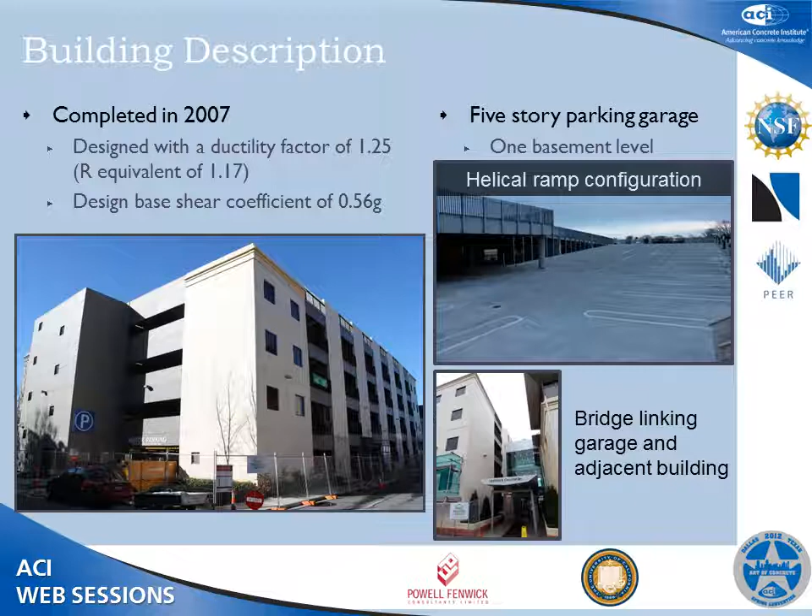The layout of the structural walls along the perimeter in the north-south direction includes 2 walls on either side that I'm calling end or corner walls that are 21 feet long, and there are a total of 10 soldier panels, as Hannah calls them, that are roughly 10 feet long, 10 total. I'm going to focus on the north-south direction because this is the direction where most of the damage accumulated. In the east-west direction, the damage was not nearly as severe.

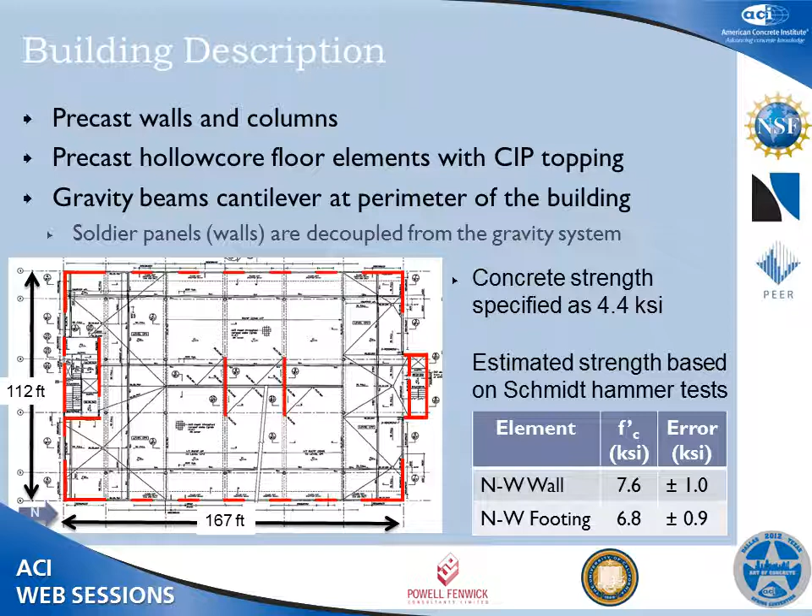Specified concrete strengths are 4.4 KSI. And on the expedition, while we were there, we estimated concrete strengths on the order of 7.6 or 7 KSI using non-destructive testing. Even though it has a large estimated error, we do expect concrete strengths that are much greater than the specified 4 KSI.

A little background on the Christchurch events for those who aren't familiar with it. It began in September 2010 with the Darfield Earthquake, a magnitude 7.1 earthquake that was 22 miles from the parking structure that we're talking about.

The epicenter is here, shown at the green star, and our structure is here just above downtown Christchurch. That was followed by the Christchurch Earthquake on February 22nd, a magnitude 6.3 earthquake, with an epicenter here, just 5 miles from the parking structure. 2 subsequent aftershocks, both magnitude 6, were located within 6 miles of the parking structure, located here.

And if we zoom into the city of Christchurch itself, the structure is located here, and 2 GeoNet sensors recorded all of these seismic events. The stations are located 1.2 miles from the parking structure, and from the peak ground acceleration of these 2 sensors, just taking the average of the peak ground acceleration from these 2 locations, we have an estimate for the intensity of shaking.

I'd also like to point out the duration or the time lag between these events. There's 171, 111, and 193 days between each of these events. So there's enough time to inspect, to plan a repair, to implement the repair, and just then you're hit with another significant aftershock or event.

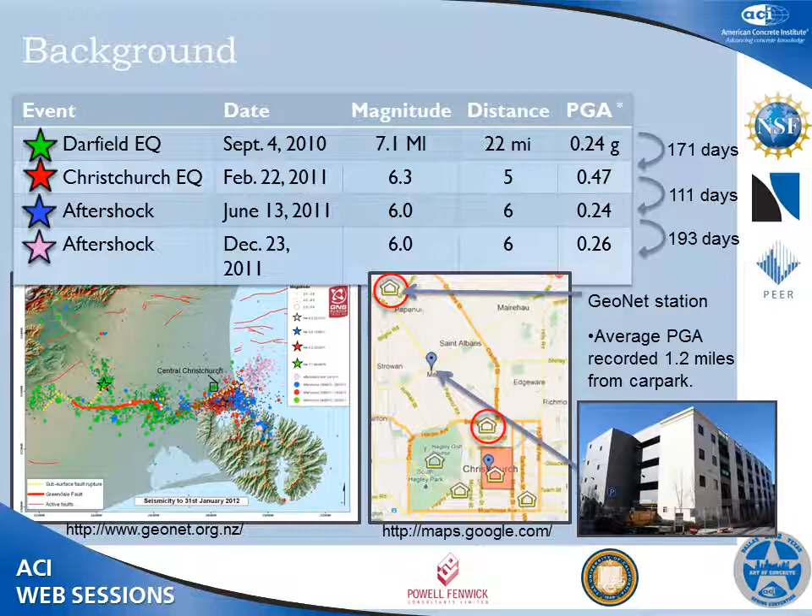In terms of the peak ground acceleration measured from those stations located 1.2 miles away, we have the first September event followed by a rapid inspection, the February event followed by rapid inspection that highlighted the need for a detailed inspection. And just as that inspection report was being handed to the client, the day of the June event, we were hit with a significant aftershock. That closed the building for two months for repairs.

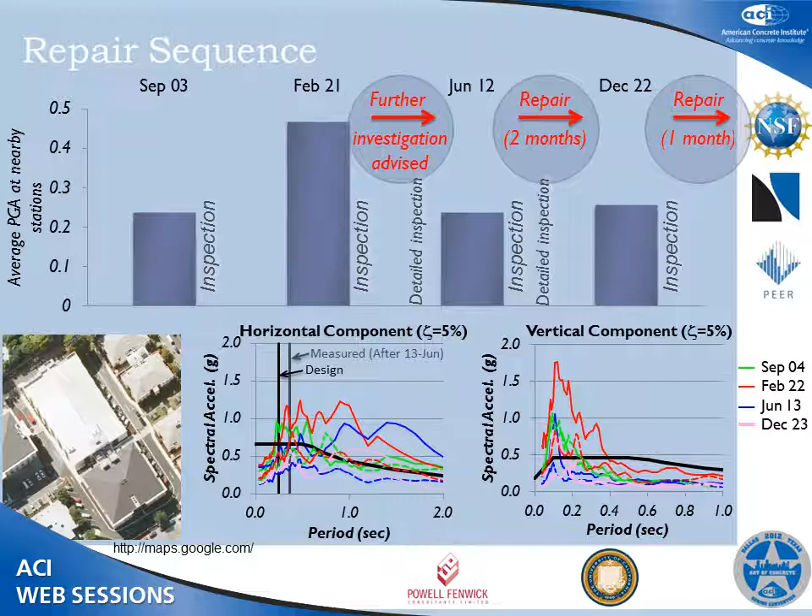After repairs were completed, another magnitude 6 aftershock occurred on December 22nd that required inspection and additional closure for 1 month. The 5% damped elastic response spectra are shown for the horizontal component and the vertical component in the graphs on the bottom. This is what I'm calling the north-south direction. Here you can see the adjacent building and the bridge linking the 2 structures. This is the New Zealand design spectra, and you can see demands significantly exceeded the 500-year design basis event.

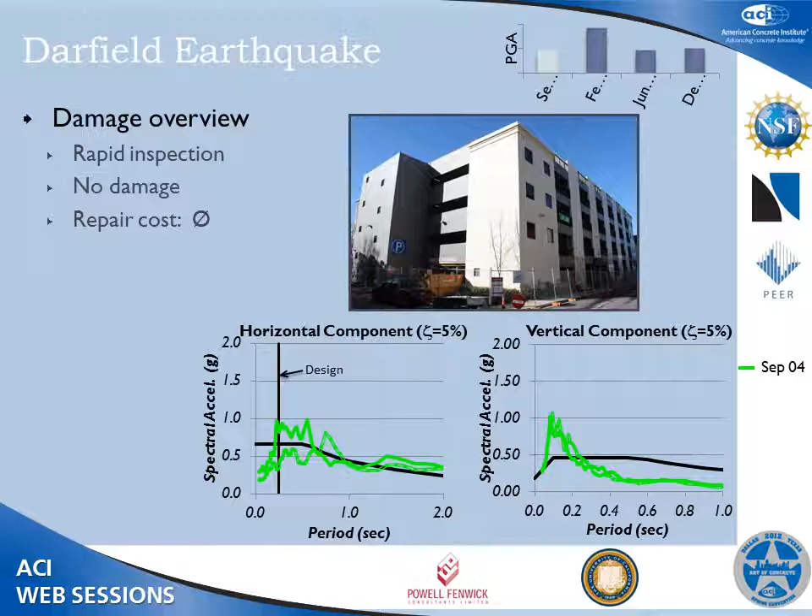The first event, the Darfield Earthquake in September, after a rapid inspection, there was no distinct damage that required repairs. We had no repair cost, despite this being what I'm calling a design level event. If this is our design basis response spectra, demands at the design period of the building are at, close to, or exceed the design acceleration, both in the horizontal and in the vertical direction. But no damage after the Darfield earthquake.

I think the surprise in the Christchurch earthquake was such a large earthquake so close to the downtown area that caused 185 deaths. After a rapid inspection, a more detailed inspection called for further investigation, which was removal of cover concrete to expose reinforcement that potentially failed, to see what needed replacing exactly. And although the repair costs were zero, the repair strategy was handed to the owner, but it was not implemented because of the subsequent June earthquake.

But in general, the damage was cracking of the soldier panels. Those are the more slender walls on the outside of the building, and on the corner walls, 3 of the 4 end walls had minor cracking, and 1 had significant cracking. And the repair strategy was simply to inject the cracks with epoxy or grout and replace the spalled regions with patch.

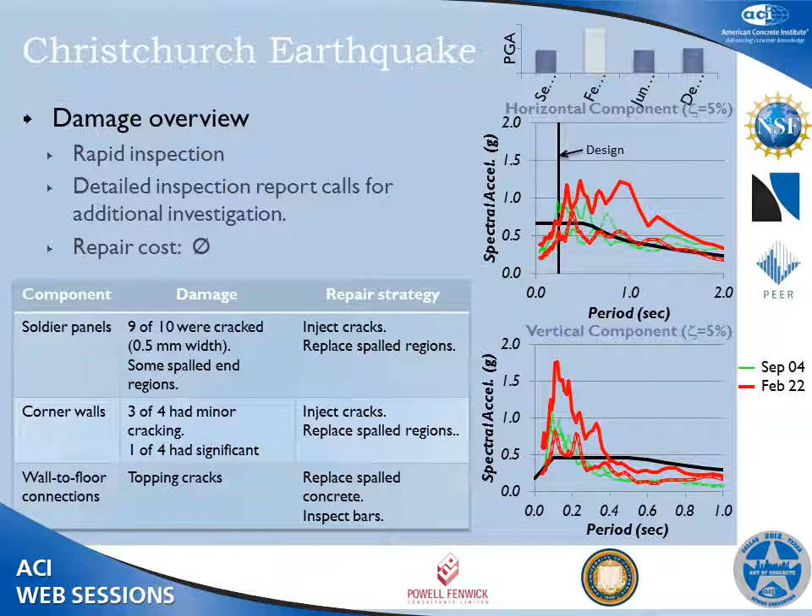In terms of this event, again, we're at a second design level event for the horizontal, and in terms of the vertical accelerations, we're above the design basis event. The black line here is the New Zealand design code for vertical acceleration. It's specified as 70% of the horizontal component.

This is an example of the damage to the connection between the floor diaphragm and the wall. This wall is located here in the northwest corner of the building, and it includes spalled concrete that you can see here that came from there, and cracks in the topping. And again, the inspection report is dated June 13th, the day of the June aftershock.

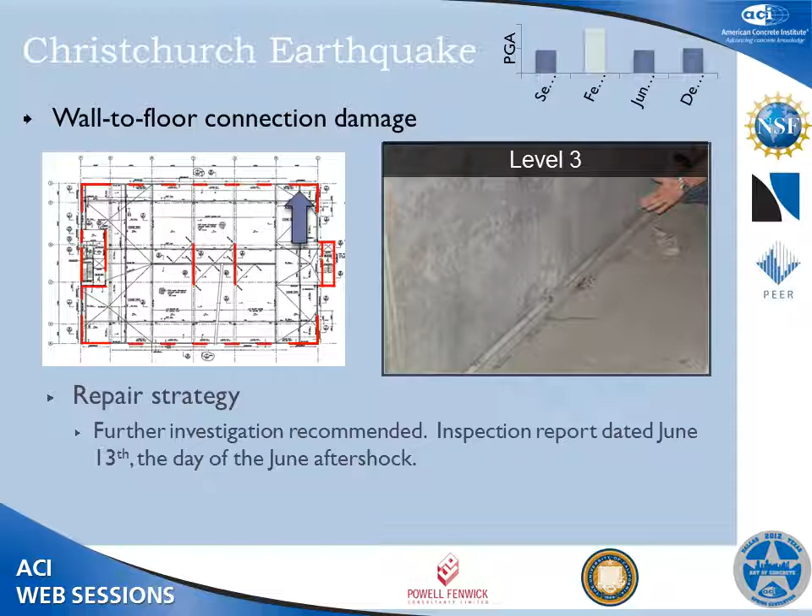So this June aftershock, there was the rapid inspection that's required. That was followed by a further detailed investigation and repairs that were implemented. Repairs were to actually replace the lowest panels in the soldier panels. 9 out of the 10 soldier panels were replaced, just the bottom section. 1 of the 4 corner walls needed replacing, and the connections between the wall and the floor diaphragm in the one wall, but at 3 locations, had fractured and required drill and bonded dowels, with the topping being removed in order to implement those repairs, with the topping being reinstated after.

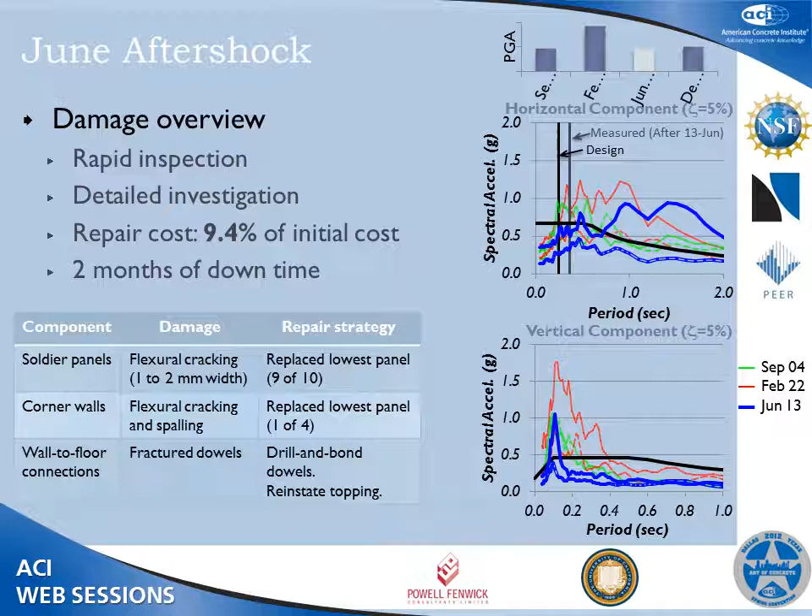The design period here shown in black, and the measured period, something that was conducted as part of the NSF expedition. We deployed sensors, I'll go over that in a minute, and monitored and captured what the fundamental period was in the north-south direction. And again, accelerations very close to a design level event, at least at one of the stations recorded nearby in the horizontal direction, and very extreme vertical accelerations.

Like I said, we recorded ambient vibration measurements using accelerometers and a mobile data acquisition system. From the ambient vibration data, we're able to compute elastic fundamental periods for both directions of the structure, as well as an estimated damping ratio of around 3% for the 2 primary modes. These sensors were installed and left overnight or over the weekend, during which we captured 6 low-level aftershocks.

And I'd like to point out the period shift here is perhaps due to both the elongation of the structure due to damage, but also we had 2 panels that were missing. While we were there for the expedition, the repairs were underway for the parking structure, so these 2 of the lower panels were actually being repaired. 4 were already repaired, and 4 were in their damaged state.

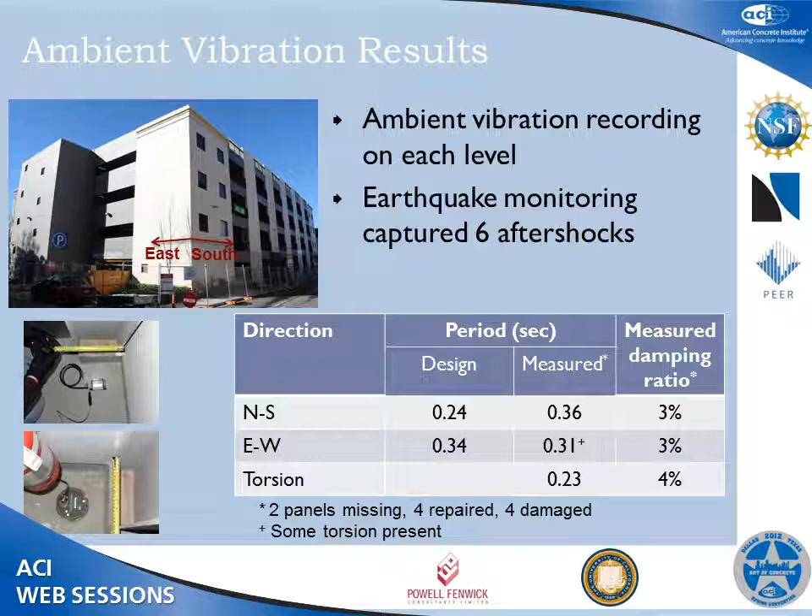In terms of the damage to the wall-to-floor connection, in the northwest wall, we have kinked dowels, we have fractured rebar, and the repair strategy for these is, first, there was a rapid repair which involved clip angles, bolted angles between the wall and the floor, and those were supplemented with removal of the topping, exposing the fractured bars, removing those, and replacing with drill and bonded dowels.

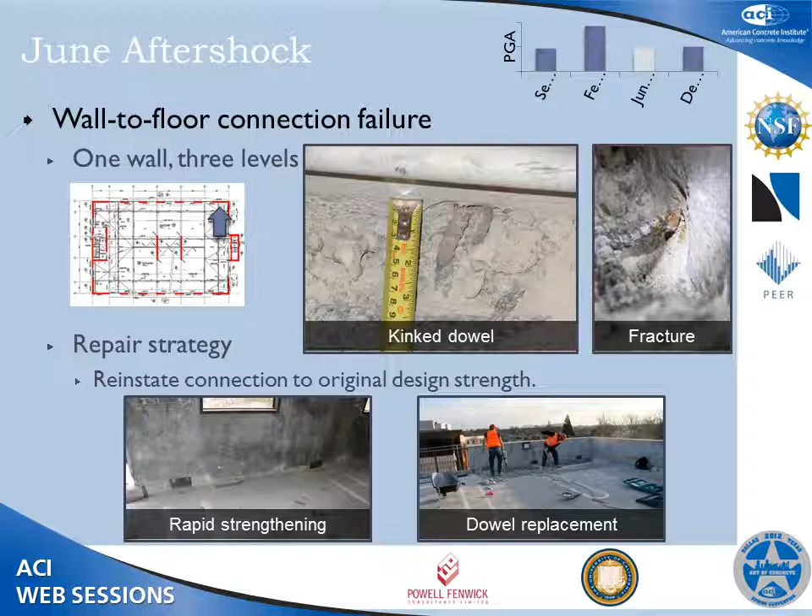The flexural damage, this is typical of the soldier panels. It's located here, and in the northwest corner wall where we had the most significant damage, this is the south face, and then the exterior and interior views of that wall where there was the most significant amount of spalling. So this entire lower panel in the soldier panels and the lower panel for this corner wall were all replaced.

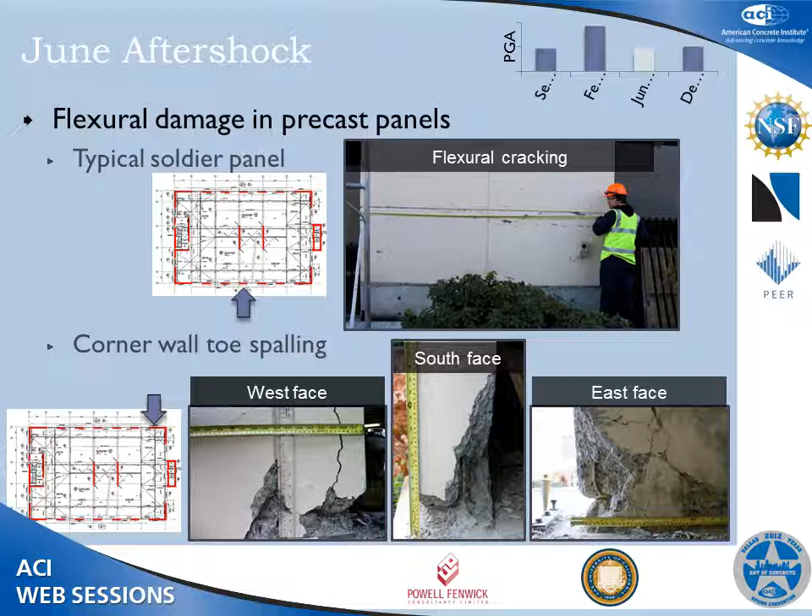This is a sample of our damage maps that we compiled as a result of the expedition to Christchurch. With photographic evidence, we're able to reproduce the crack patterns, the spalling that occurred between the spandrels and the wall. This wall here was actually being repaired. This panel here was not there while we were visiting, and these 2 panels had already been replaced.

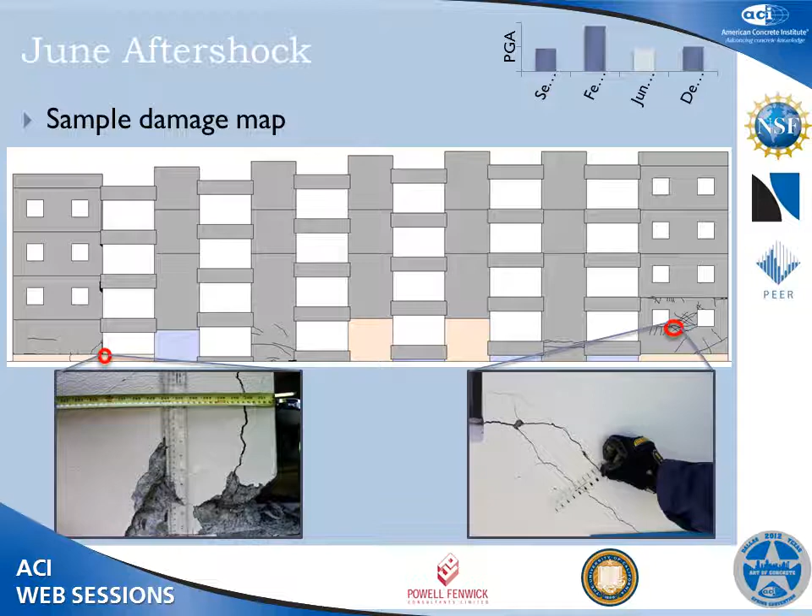The repair process was to first prop up the nearby members, then remove the lower panel that was damaged, use the capacity protected, and this is very important, the capacity protected starter bars. These starter bars were designed so that they would not yield in the design event, which really facilitated a rapid repair. Replace the reinforcement, prop up formwork, and put a cast-in-place wall.

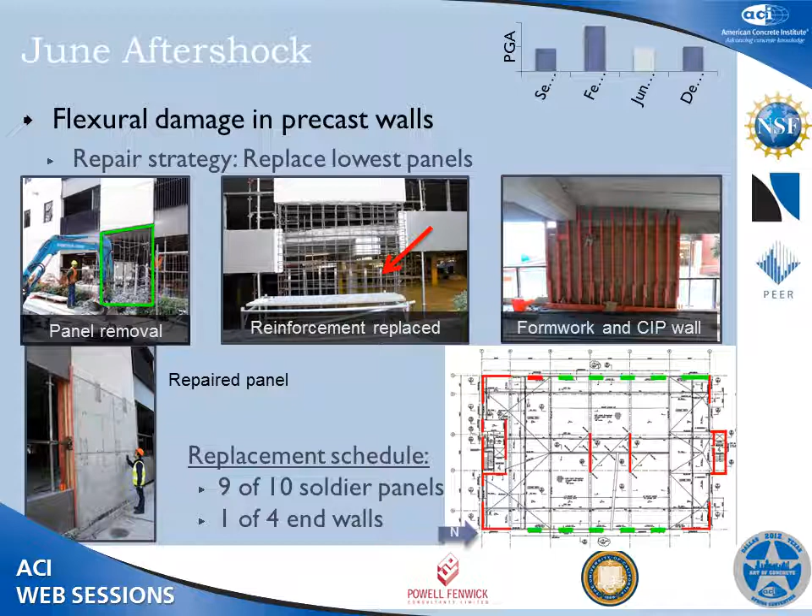Here's the repaired wall at the lower left after casting. The walls repaired, shown in green, were the 9 soldier panels and 1 end wall. For walls that were not replaced but had significant cracking, the repair strategy was to do grout injection.

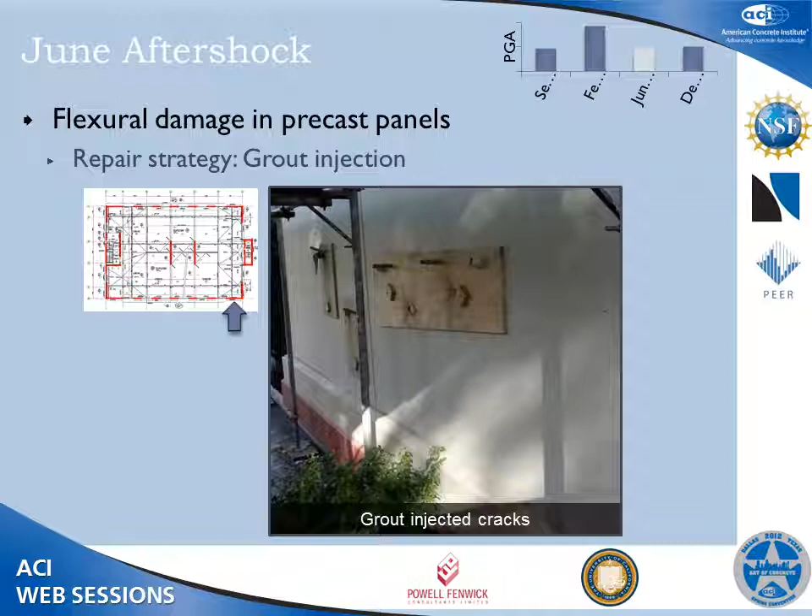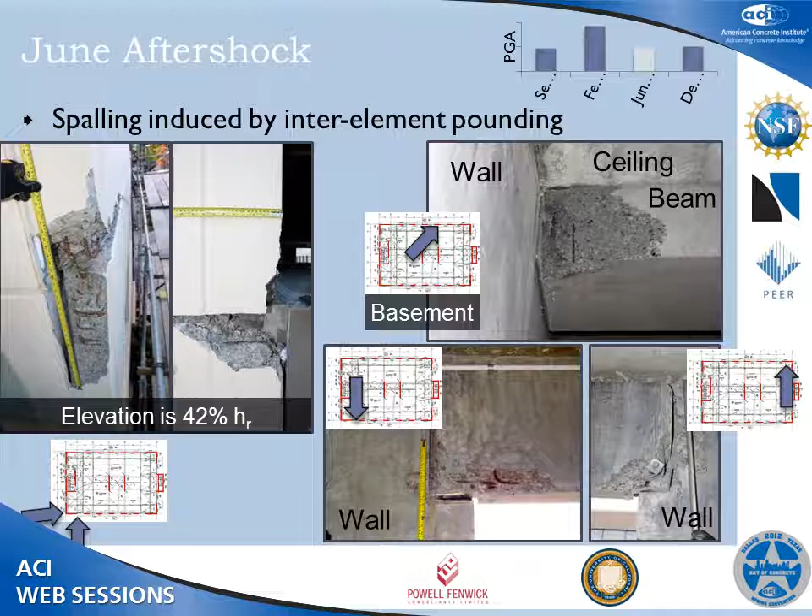In terms of non-structural elements, again, in regions between the stiff end wall and the more slender soldier panel, we saw pull-out and compression failure of barrier railings that were induced into these walls. And the repair strategy for this is to remove the concrete, check that the bolts are still intact, and patch the concrete. Hannah's comment is that ideally these elements would not have been tied between the 2 lateral force resisting elements, but barrier loads required this detail.

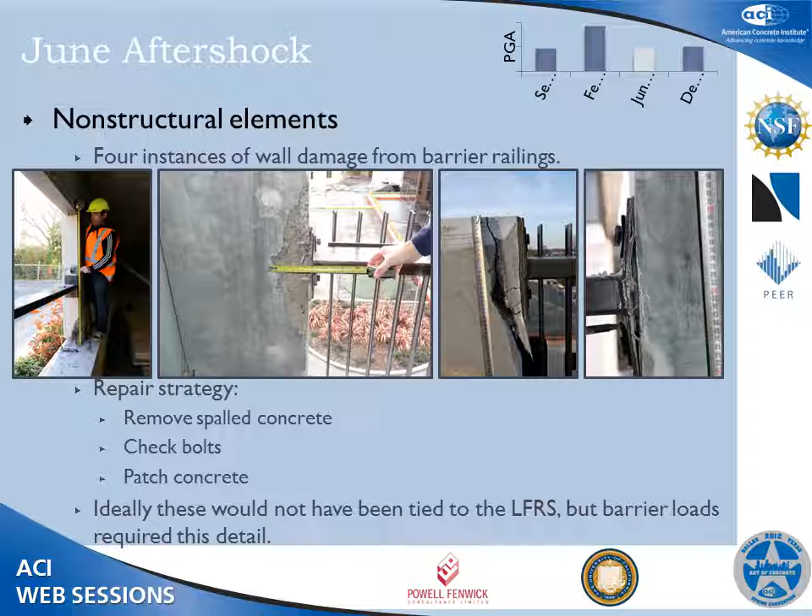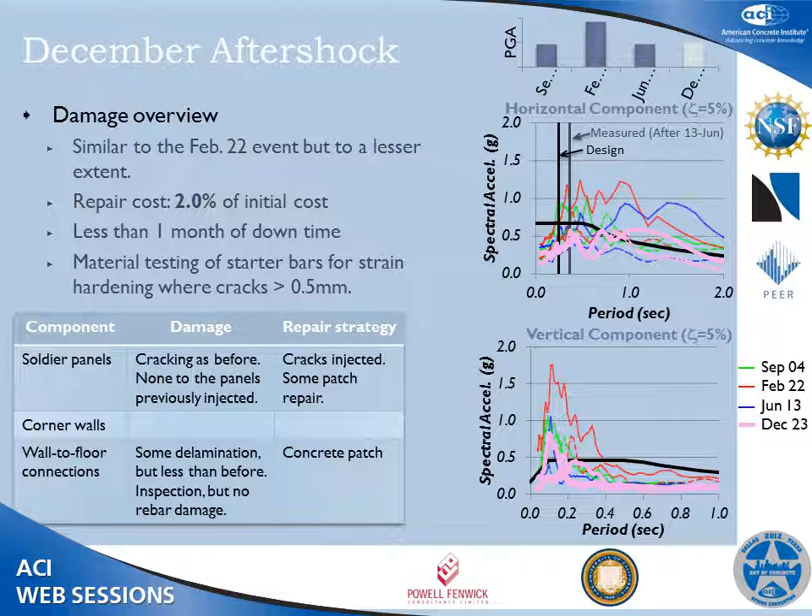I'm not going to go over the December aftershock, but to say that there was similar damage to the February event, which was here. It was not as extensive, and it was closed for 1 month for further repairs to do crack injection and patching of some spalled concrete. The repair costs for this December aftershock were 2% of the initial cost, and the repair cost for the prior event was 9.4%.

We have some general observations. This structure is an example of anticipated performance from new construction. I'll remind you it was built in 2007, of a nominally ductile structure subjected to repeated seismic demands at or above the design scenario. The facility was under repair and non-operational for 3 months. The total cost for both repair scenarios was 11.4% of the initial cost, but this does not include direct revenue loss.

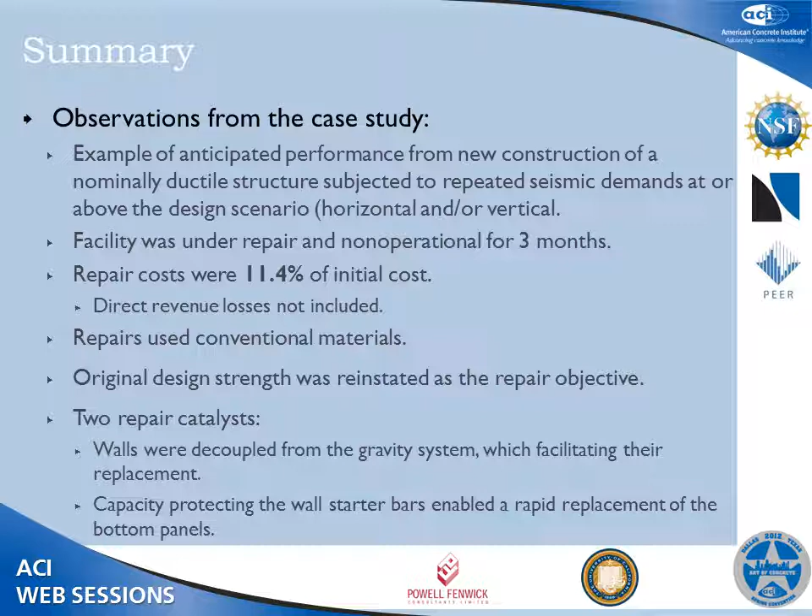I'd like to point out that the repairs included conventional materials. The original design strength was reinstated as the repair objective. There was not a need to increase the strength beyond what was originally designed for, and there were 2 catalysts that really facilitated this repair. One was the fact that the gravity load beams were not tied to the structural walls, but were cantilevered out, and this meant that the structural walls were not part of the gravity system. And also capacity protecting the starter bars really facilitated a rapid repair for the replacement of those walls.

Hannah had several comments about her experience, and I'd like to just point out the last one, which is that better education of the clients and the community is needed. There is an expectation of operability post-event, and those are not in line with the performance delivered in the structures that we're currently designing. And she says that the public in Christchurch is slightly better aware of this situation now, but that other communities could benefit from addressing this expectation.

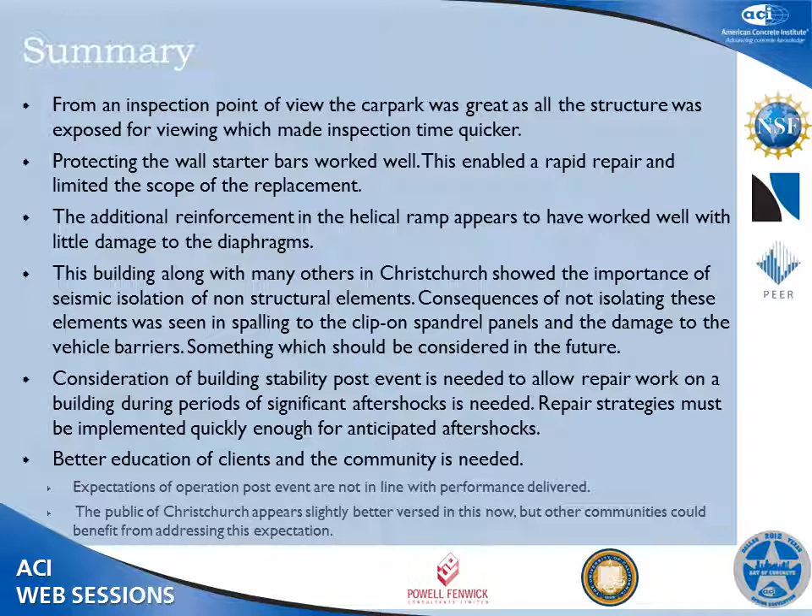The starter bars that you mentioned, were they existing starter bars or new starter bars? They were existing starter bars. They were from the initial design, and they were capacity protected, meaning the weak link or the fuse was not at the base of the wall, but rather up about a meter. And that's why you saw several flexural cracks, not at the base of the wall, but quite a bit higher. So they were protected.

And how did you connect the new bars to the starter bars? So let me reiterate that I was not part of the design of the repair. That was all Hannah Clark's responsibility. But the question was simply, these are precast. They were initially precast panels, so the starter bars were simply grouted in the precast panel to begin with. Yes. So simply casting a new wall around that was enough development. I mean, you saw the additional reinforcement that was included.

So you had to put new bars in the replacement panel. Yes. And how were those bars connected to the existing starter bars? Yeah. Just laps? Lap splice, yeah. I see.